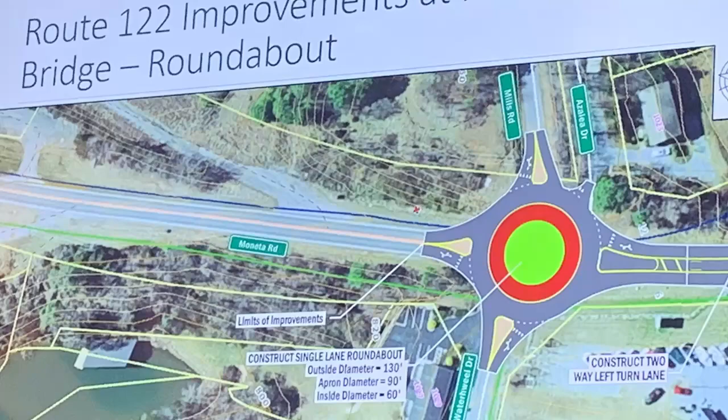Left turn lane concepts at the respective intersections: Route 122 at Fancy Farm and Centerville, Route 221 at Centerville and Timber Ridge Road, White House Road at Radford Church and Feldspar. And lastly, we have the Route 122 improvements at the lake.

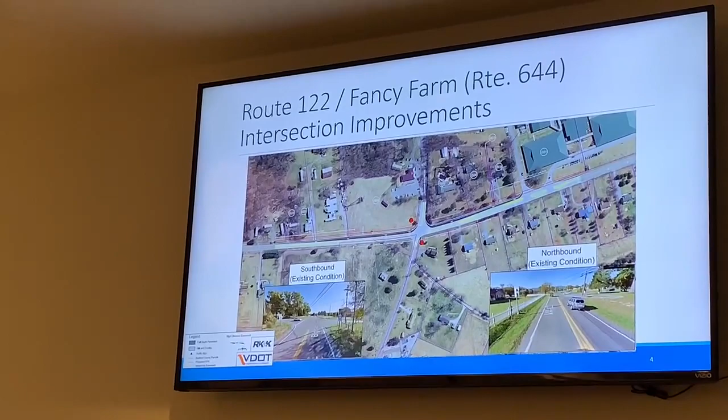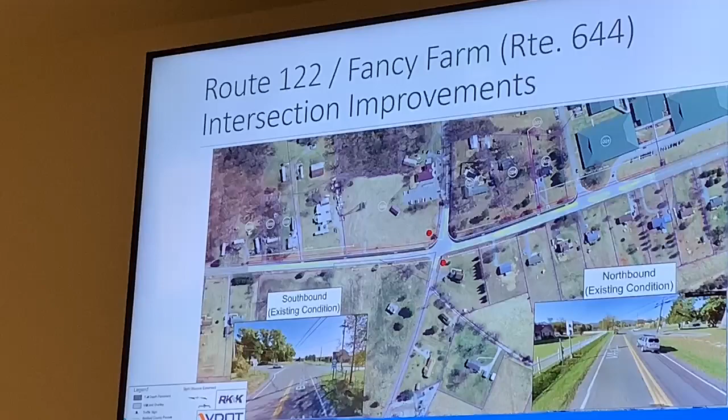But first, looking at the Route 122 turn lanes at the Fancy Farm, Centerville intersection on screen there, Liberty High School in the top right corner. This project is considering adding left turn lanes on Route 122 at that intersection. To accommodate those left turn lanes, the roadway width is expanded there towards the Centerville direction.

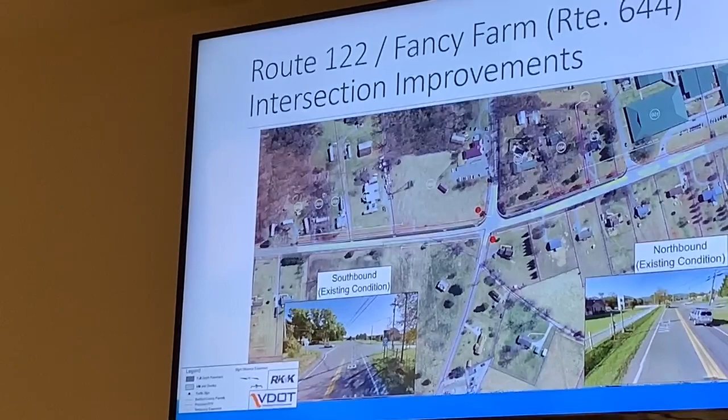The driver behind this project is primarily safety. There's a high crash volume history at this location, so those left turn lanes will hopefully reduce the number of rear ends and angle crashes at this location.

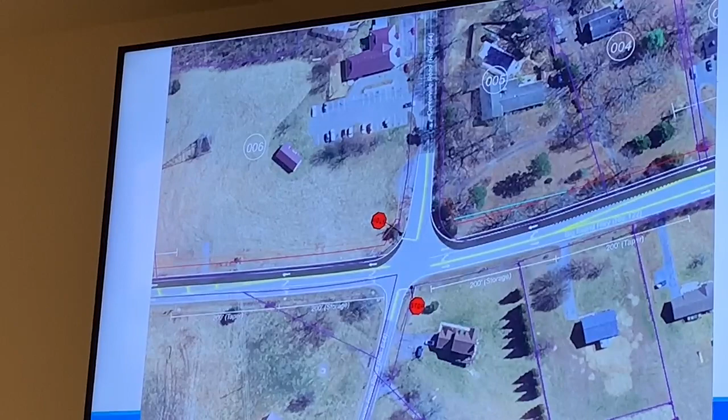So hopefully that's a little bit easier to see. This is a close-up of that intersection. You can see the left turn lane concepts at that intersection, and then the darker shaded area depicts the pavement widening to allow for those left turn lanes towards Centerville.

Moving on to Route 221 at Centerville and Timber Ridge Road, similar left turn lane concept here. Again, apologies for the small graphic on your screen. Again, safety is the reason behind this project. This location, as well as the previous location shown, are some of the actual highest volume crash locations for intersection types like this throughout the county.

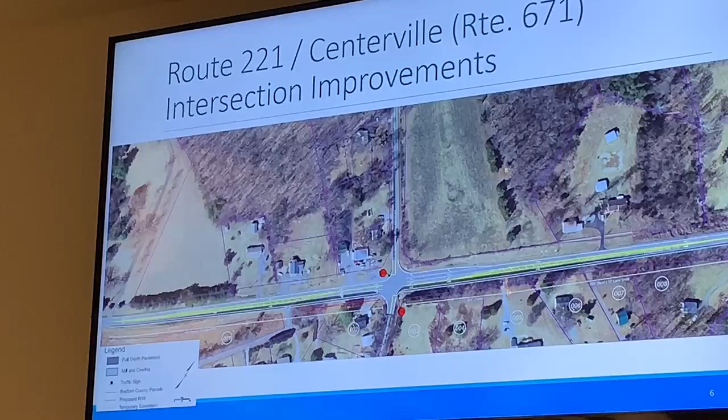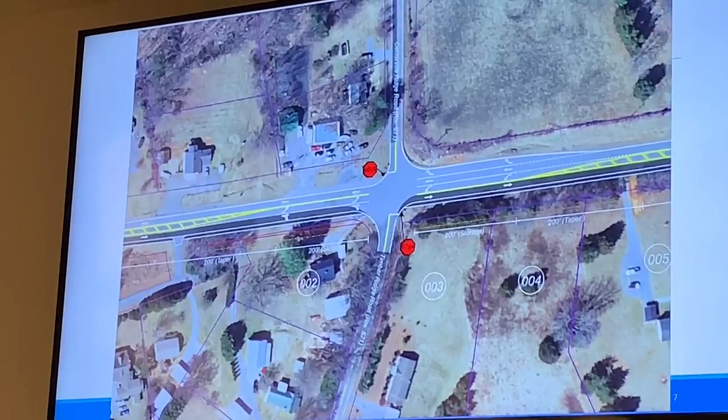So again, installing left turn lanes to try and reduce the number of angle and collision crashes from vehicles navigating the intersection. Here's a close-up of that intersection, a little closer at least. Left turn lanes on 221, darker shaded area depicts the pavement expansion in the Timber Ridge Road direction there.

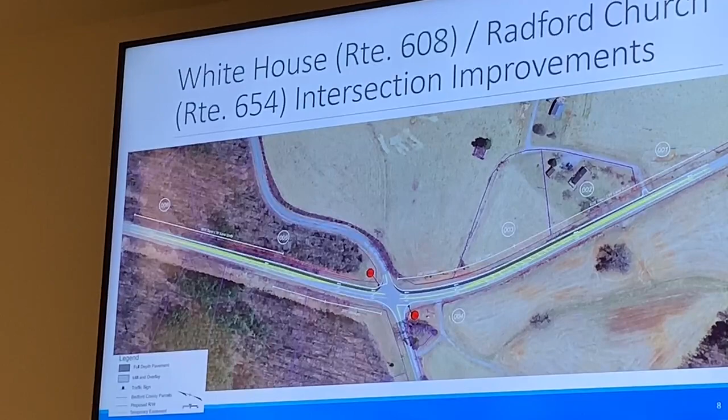Moving on to White House Road at Radford Church and Feldspar. Again, similar left turn lane concept. This location also has a pretty high crash history, which is compounded by the annual seasonal summer traffic volume increases that this location sees in summer.

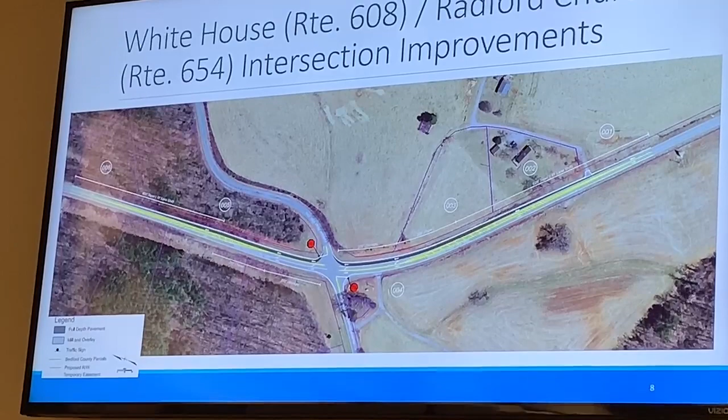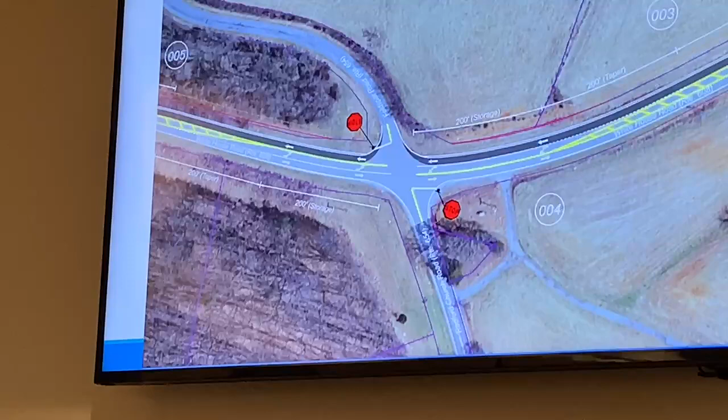There's a zoom in, left turn lanes on White House there, and pavement is expanding towards the Feldspar direction to accommodate that.

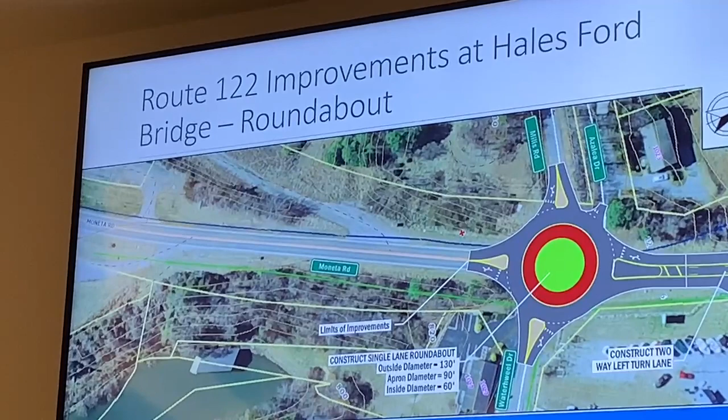Okay, moving on to Route 122 improvements at the lake. I will say I have two different concepts that I will present here tonight. The one shown here is the one that was included in the letters that were mailed out to impacted property owners. The drivers behind this project are really twofold.

Again, safety. There's a high crash volume along this corridor, and also looking at access management improvements along the corridor for roads adjoining 122, all the businesses and homes along this corridor. So I will step through the project scope over the next couple of slides, starting here and moving away from the lake. Just to orient you, Hales Ford Bridge is just off the screen to the left there.

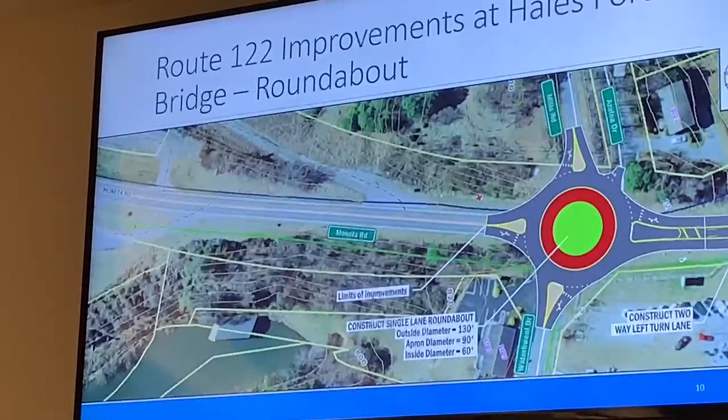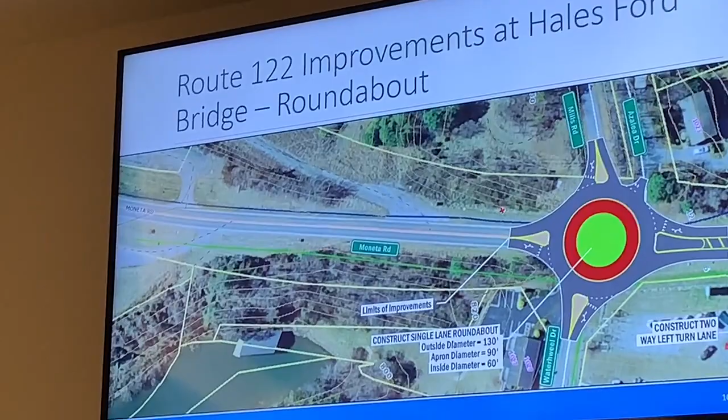So first we have a roundabout concept at Mills, Azalea, and Waterwheel. This roundabout is intended to enhance access for those adjoining roadways and the adjacent properties, but it also serves as a big traffic calming feature to reduce speeding along Route 122 while managing the traffic volumes that flow through there.

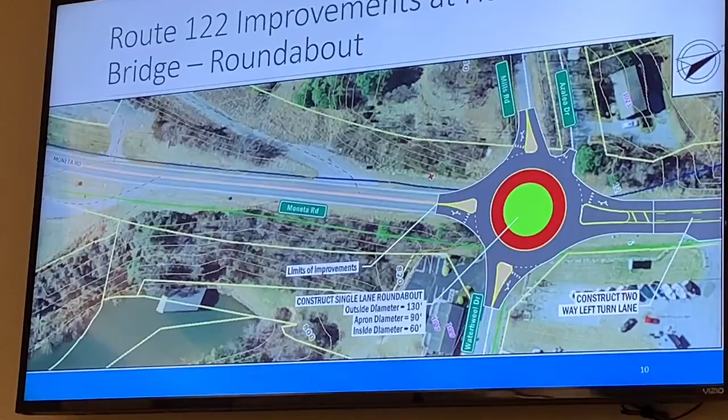Moving away from that roundabout, we have a center turn lane concept along the Route 122 corridor. Again, similar to the other left turn lane concepts, trying to mitigate crash risks along this corridor, as well as enhancing access to the adjoining parcels.

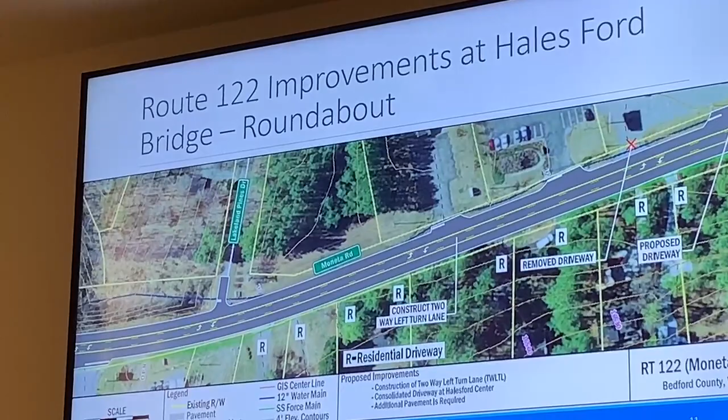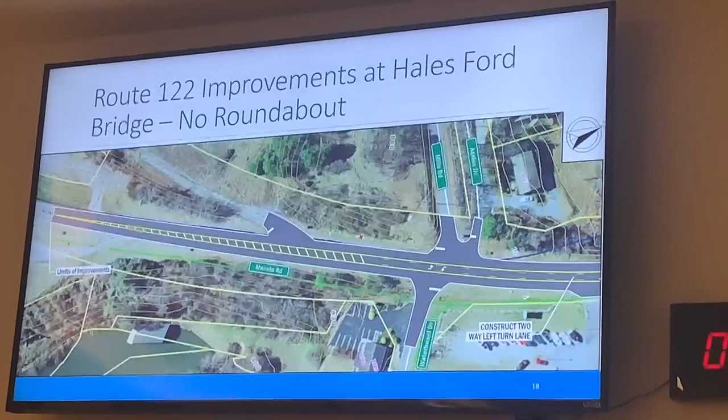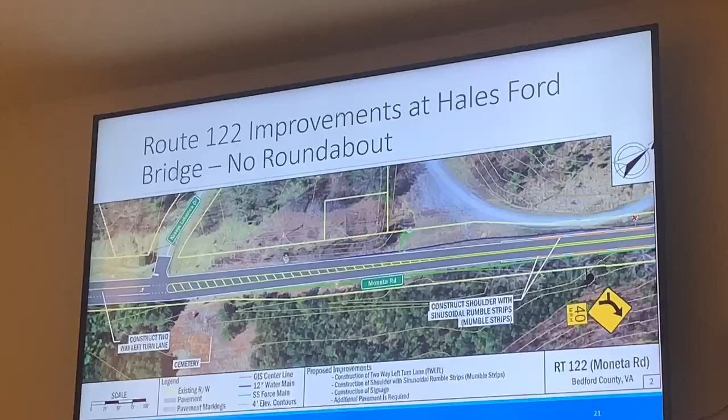So if the preference is to move forward without that roundabout, that center turn lane would be carried further towards the bridge, and everything else beyond that is the exact same as what I just went through. So we have the center turn lane, carrying down 122, transitioning back down, and then the shoulder rumble strips.